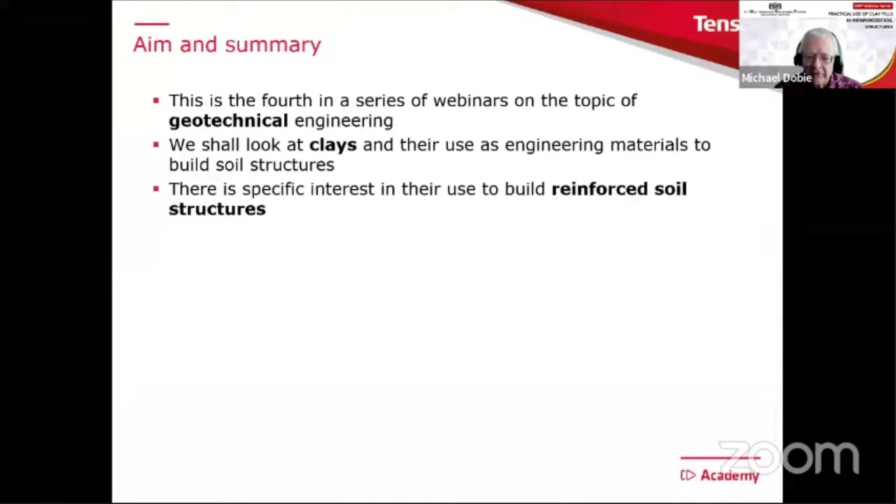So this is the interest today: looking at clays and their use as engineering materials, and in particular for reinforced soil structures. There will be another webinar in this series next month with a significant change of topic, where we'll look at the use of CPTs in soft clays. So quite a different topic, and that'll be next month.

So there is a list. In the first three of these webinars we've developed ideas about soil properties in general. We've looked at measuring soil shear strength, and we looked at the principle of effective stress. I think looking at clay fills is an obvious continuation of this theme, and that's the reason for this particular topic today.

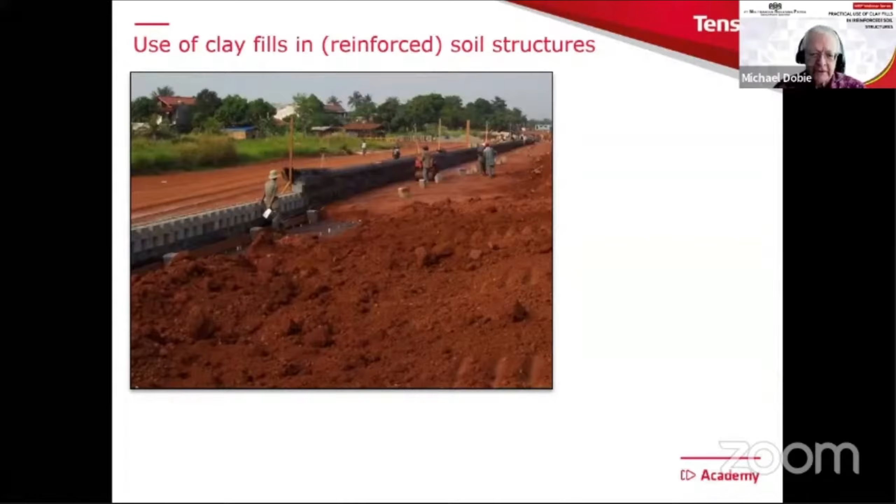So some pictures, some clay fills in action. This is actually construction of part of the Jakarta Outer Ring Road using our well-known Tanah Merah. This is a clay fill of volcanic origin material, and it forms a very good fill. One reason being that it has a predominance of a rather interesting clay mineral called halloysite, which at a microscopic level looks something like this.

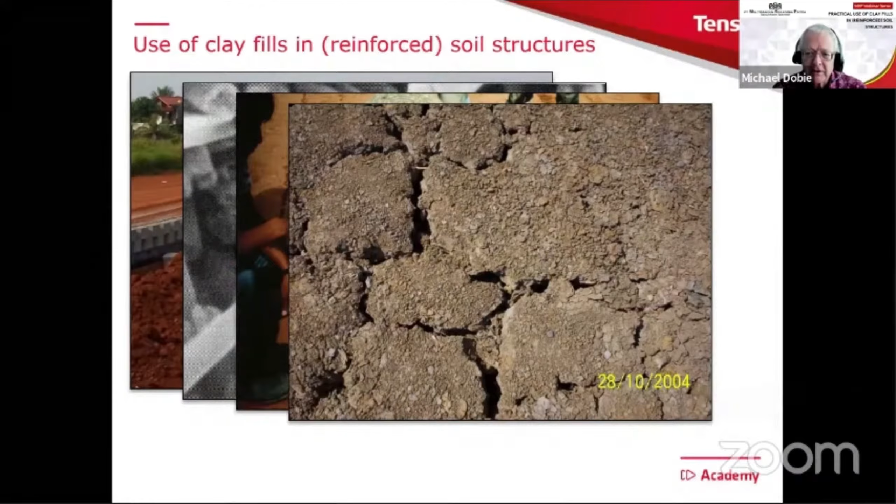Here's another nice microscopic picture, using an electron microscope, in this case of a marine clay. Again you can see that kind of structure. There's a scale bar at the bottom showing you what 2 microns looks like, so you can see that clay particles are clearly very small.

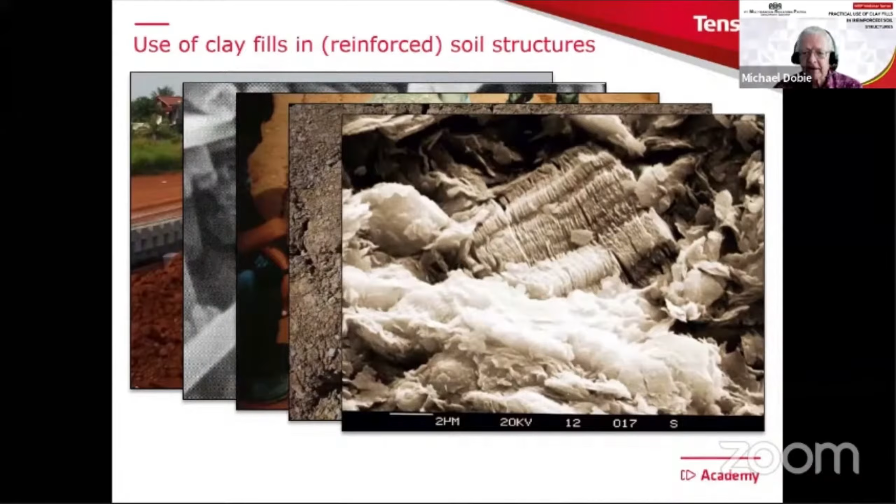What's this intended for, the webinar today? We're going to talk initially about clay, and we'll talk about some soil mechanics aspects of it. Then really the main aim is to look at one particular point: the likely pore water pressure that will be inside a mass of clay fill after you've built it. This is vital to understanding the next part, which is what are the appropriate drainage measures you should use when building a structure using a clay fill, whether it's reinforced or just a general embankment.

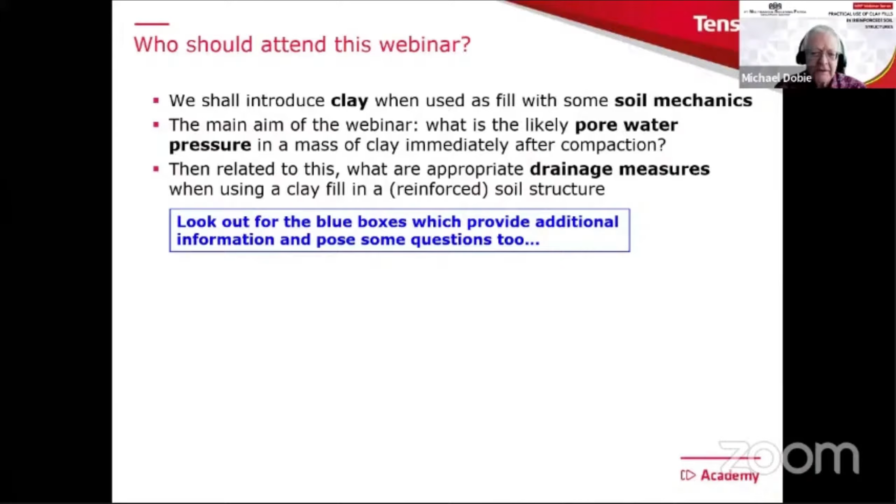As we go along through this webinar, as I usually do, there'll be blue boxes appearing with some additional information, and we may ask a few little questions as well. This is really intended for civil engineers who have some involvement in ground engineering - that's our main target - but hopefully also of interest to more experienced geotechnical engineers. The main target is, without a doubt, reinforced soil applications, but as mentioned, the ideas here could be useful for a wide range of design applications where we use a clay fill or other fine fills.

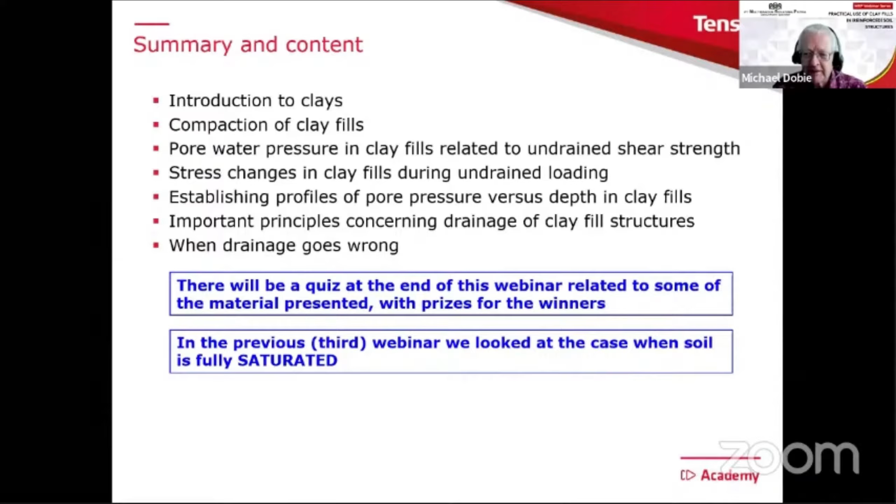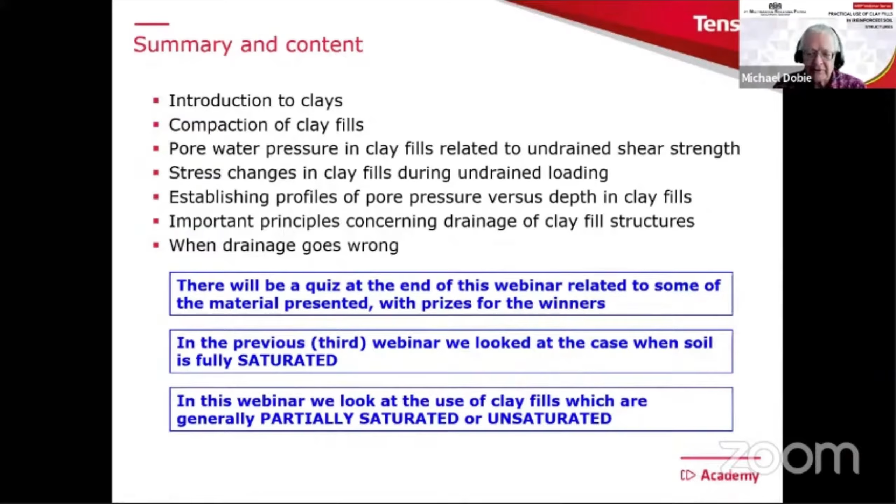Just to make a point that the third webinar, the one we did last month, that was looking principally at the case of soils which were fully saturated, softer soils maybe, but soils below the water table. The main difference today is that we're now looking at clay fills, in which case they're going to be either of two terms we commonly see: partially saturated or unsaturated. This does give some differences in behavior, and I will touch briefly on that a little bit later on.

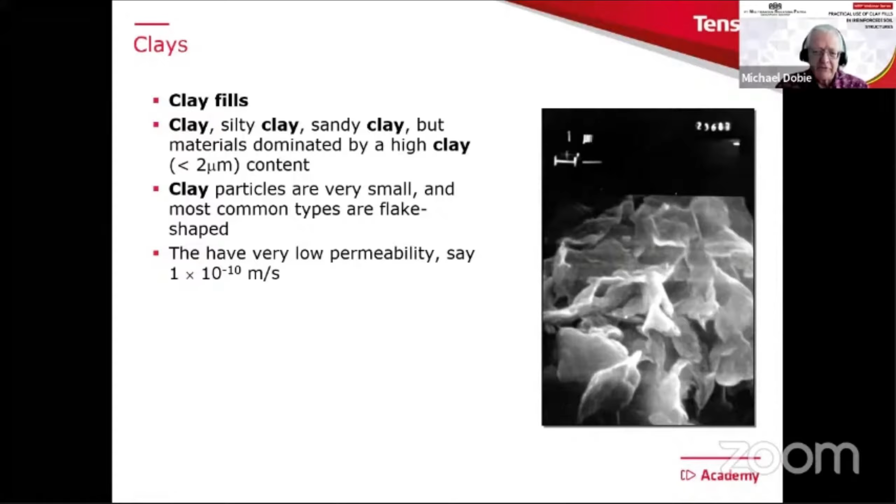Now this is a really small number, sometimes difficult to imagine what it really means. But in the first webinar, I came up with a different way of understanding what permeability means. So that particular permeability would be something like this: if you watched a particle of water traveling through 1 meter of clay under a gradient of 1, it would take 320 years. So you can see that water through a well-compacted clay travels extremely slowly.

Another good starting point when you're looking at clays and considering using them as fill would be to look at its Atterberg limits and plot them on the famous Casagrande or plasticity chart, where we plot plasticity index, the PI, against the liquid limit. This is a really useful diagram. I'm sure as you will know, we have a famous line called the A line, the thick inclined brown line going up there, which also matches very closely to the AASHTO designations of different soil types.

What would be the important targets for clay fills? You would want to have them certainly on or preferably below the A line. As you go higher above the A line, you tend to get into soils that are more susceptible to changes in moisture content. You'll get more swelling, more shrinkage, as we saw earlier in that picture of the cracked soil. So preferably below the A line.

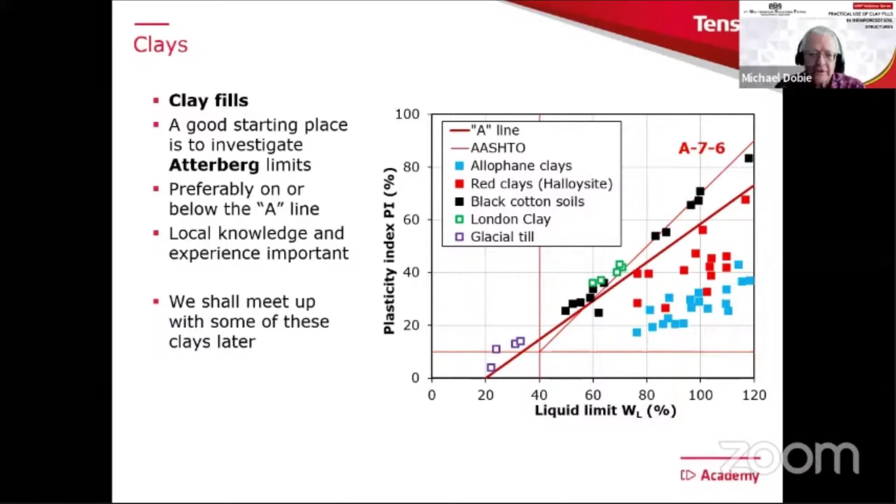So just a bit of a change of view for a minute, think about something different. I don't know if anyone listening today has ever had a chance to make a clay pot - maybe something you did at school, but it's fun. So what do you do to make a clay pot?

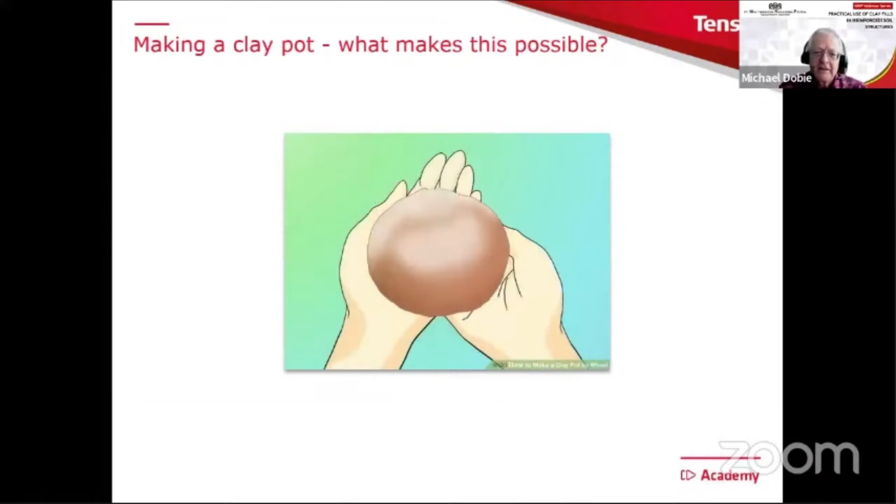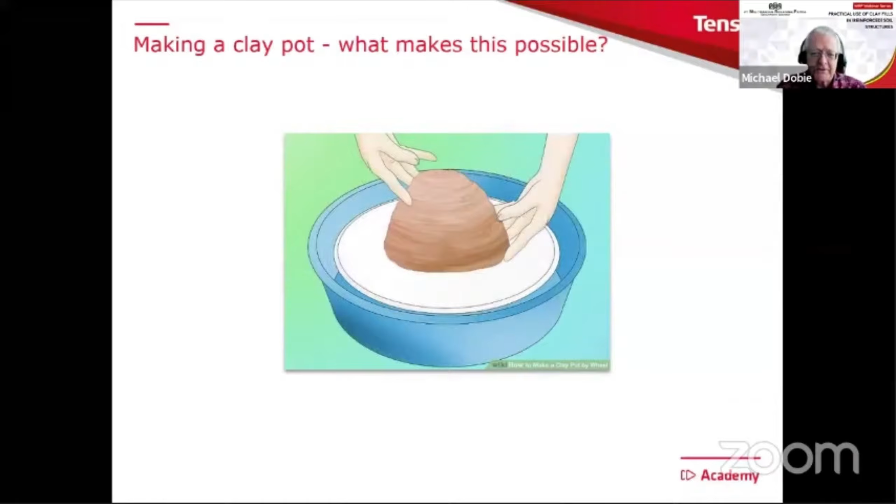You start off with a big lump of clay, which you knead into a ball, then place it on a wheel, which you can spin. In the good old days you'd do it with your feet, but probably now it's electric. Anyhow, this would spin, and then you could use your hands to create a shape as it spins round and round, maybe even creating a hollow in the middle to turn it into a pot, then perhaps make a nice shape at the top and end up with your pot, which you then remove.

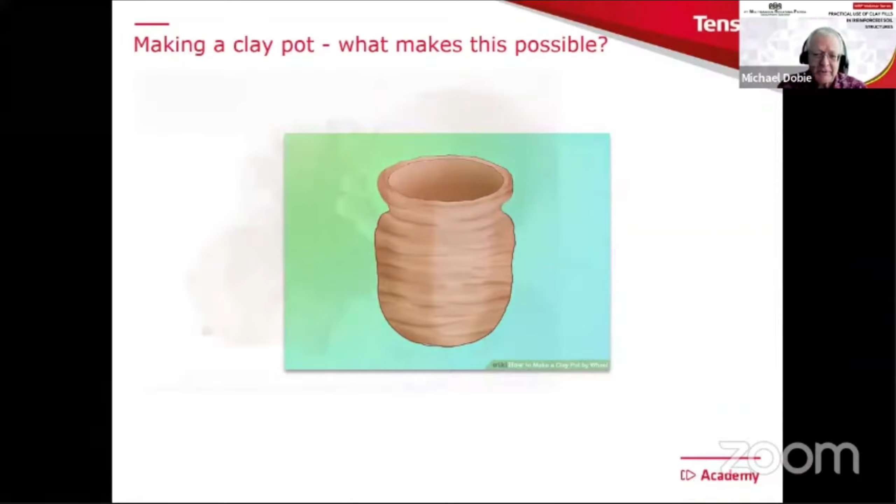And of course, you then put it into a kiln. The kiln will go up to a very high temperature and create significant chemical changes. But before that happens, it's a question - how on earth does that thing stay up? It's just clay after all. And how does it stay in that nice shape, especially when we look at the real case? There is the real situation - the ball of clay spinning on the wheel, and there is the pot before firing. How does it retain this shape so precisely?

I think the answer to this is much the same as the answer to the next question, because the next question will now move to civil engineering and look at a case like this, where we have a construction site - a clay fill, actually in the west of Java. You can see that this clay fill is supporting extremely heavy compaction plant. Well, how can it do that? There must be something going on that allows it to do that.

So I thought it would be useful to do a bit of soil mechanics at this stage. During the last webinar, I set a bit of a challenge to see if people could derive a particular relationship where we can predict the undrained shear strength based on the drained strength properties, or the effective stress properties C dash and phi dash, which we have to do by using the geometry of the Mohr diagram.

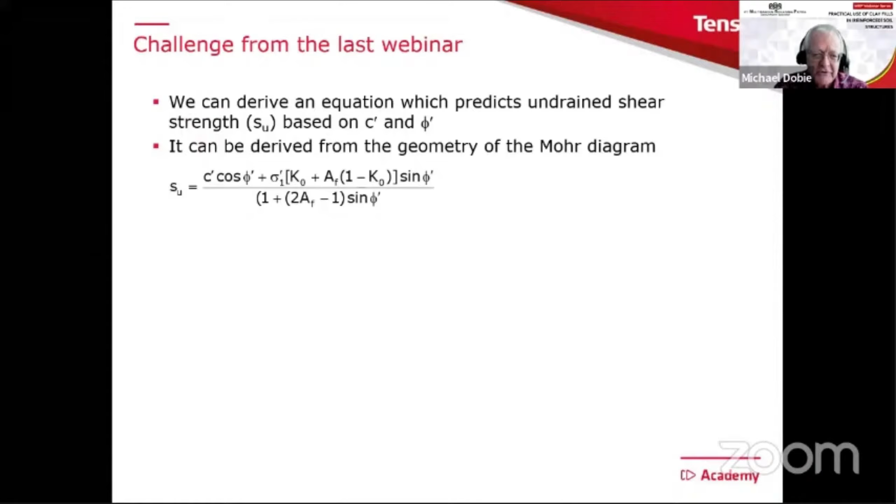If we do this, we end up with this expression where you can see we have undrained shear strength on the left, equal to quite a number of terms, but they're all very familiar. You need to know two things here to use it: K naught and AF. AF is the Skempton pore pressure parameter, relating change in water pressure to change in shear stress. And the challenge was, can you derive this from first principles?

I'm pleased to say, yes - James Utomo did this. He sent in his derivation, and it was perfectly correct. He received as a prize the book Mekanika Tanah by Laurie Wesley - that was the shorter book. Congratulations to James on doing that, he got it perfectly right. But I want to use that expression now.

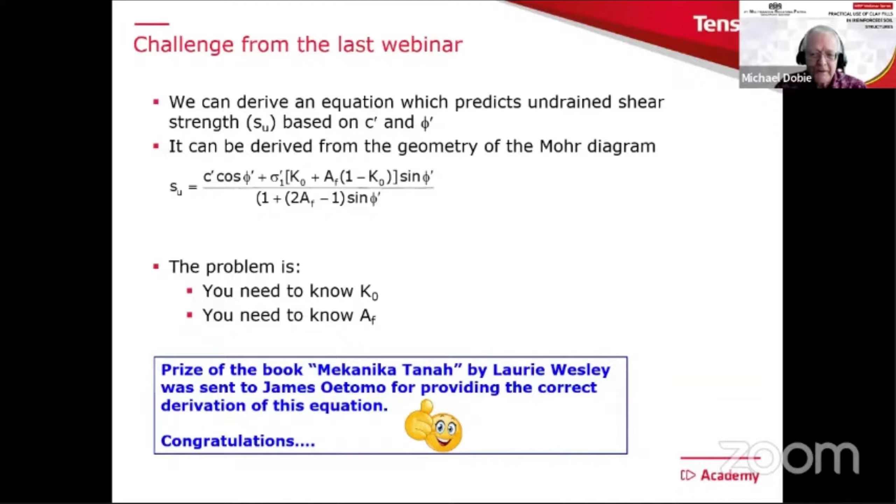Let's go back to our site and consider a depth of 0.2 meters below that very heavy vehicle or plant. Let's assume our water table or phreatic surface is at ground level, meaning the clay would be saturated. With that information and typical clay properties, assuming a K0 of 1 and an AF of 0, which seems reasonable for that material, if I put this into the expression, the undrained shear strength comes out at 5 kilopascals. If you know what that means, that's an extremely soft clay.

You almost certainly could not walk on it. And certainly if you tried to place and compact a clay with an undrained shear strength of 5 kilopascals, it would not be possible. So perhaps to understand this better, let's turn to typical compaction requirements we might use, especially for clay fills.

The normal starting point is a compaction curve, derived from the Proctor test. We develop a relationship between dry density of a soil and its water content for a particular compactive effort, and the red line shows the result as a series of plotted points. The solid black line represents the soil being fully saturated, meaning you cannot find points plotting on the right hand side or above that line.

The dotted line represents a 90% degree of saturation, or 10% air voids — meaning the pore spaces are mainly filled with water, but 10% of that volume is air. The traditional way of specifying compaction is based on achieving a certain percentage of maximum dry density over a certain range of water content.

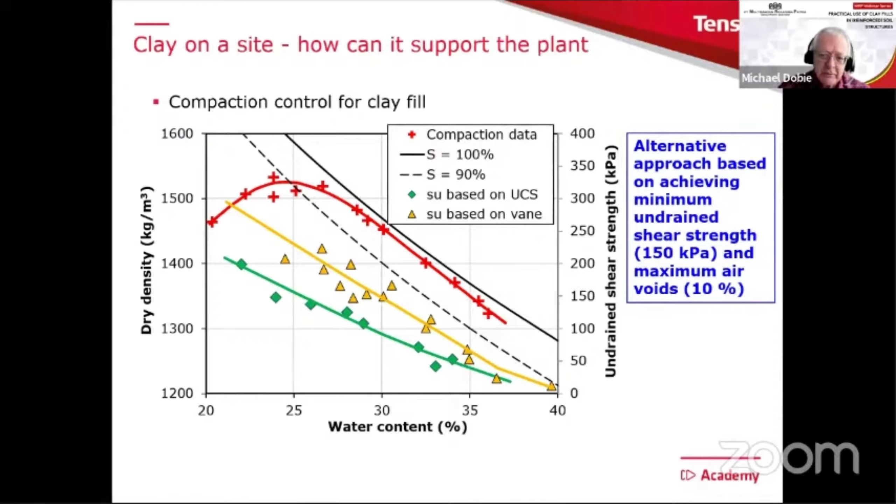Another way of doing this leans heavily on work from Laurie Wesley, coming from experience in New Zealand. This approach requires achieving a certain minimum undrained shear strength, which is easy to check with a hand vane or penetrometer, along with a maximum air voids content, typically about 10%. So our targets would be an undrained shear strength of 150 kilopascals and maximum air voids of 10%.

On this graph, I've plotted the undrained shear strength in yellow and green dots, taken from different compacted samples, with the scale on the right. If we restrict ourselves to at least 150 kilopascals of undrained shear strength, we need to stay inside this blue shape. It's a bit different now because we also want our maximum air void content to be only 10%, so it follows the S equals 90% line.

This is found to be a very good way to specify compaction requirements for clay fills. I'm not sure if anybody listening today has tried this rather than the traditional approach, but in many places, this is the preferred way of doing it.

What we can see from this, importantly, is that clay fills are going to be partially saturated — the pore spaces will contain water but also some air. The degree of saturation will be quite high, typically greater than 90%. If you had very low degrees of saturation, the clay lumps would become so hard you wouldn't be able to compact them. So you need a significant amount of water in the clay to allow you to remold and compact the material.

If you attended that webinar, we looked at a case where we have a soil element below a water table underneath an embankment, and we wanted to understand what happens when we apply a total stress to that soil element without drainage taking place. The way I did this was to isolate the little element and have a close look at it like this, and to make it easier we enlarged it, then looked inside to understand what would go on.

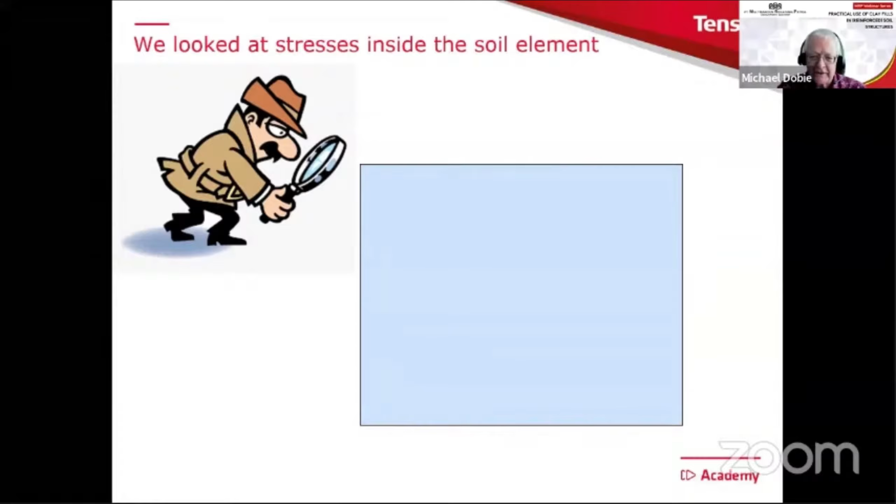It was quite a long description, so I've just taken part of it. What we're looking at here is a box, and in this box the top can move up and down. The brown lumps are the soil particles, and the blue is the pore water. If it's fully saturated, then it's all blue. We then looked at the case of applying a load to it.

Before I get there, just to mention, on the right-hand side we have a gauge to measure pore pressure, U, and we also have a tap. Today we're going to keep the tap closed because we only want to look at undrained behavior. So if the tap is closed and nothing can leave the system, this is the undrained condition. Above the box I've written the principle of effective stress, saying total stress equals the effective stress, the intergranular stress, plus the pore pressure, the pressure within the pore spaces, in this case in the water.

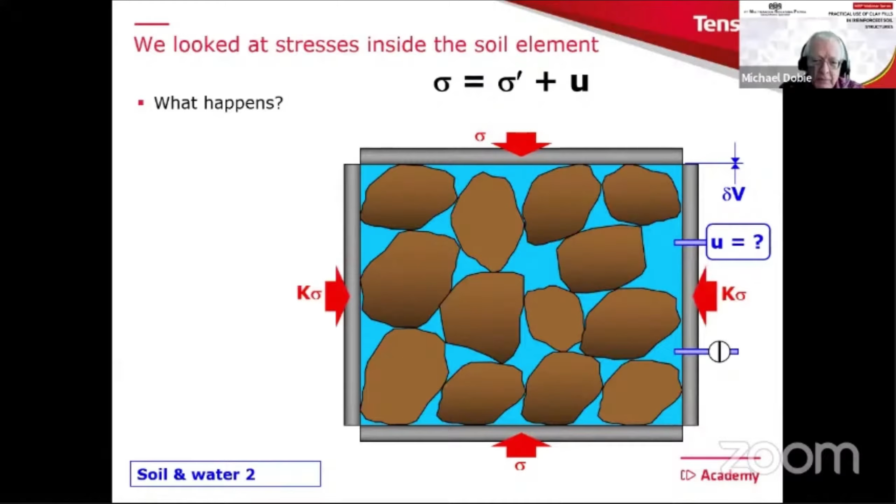So we're going to apply a load, sigma, on the top, or a stress. Then the question is, what happens when we do that? We need to restrain the sides to prevent the box from breaking open, so we apply K times sigma there. The question we asked, same as last month, is: if we do this, then what's U? What is delta V, the change in volume? And what is K, the proportion of sigma required to prevent the box from splitting open?

In this particular case, we also want to know something else: what is the stress that's transferred through the soil grains, which would be the effective stress? In this situation, it'll be like this: the U value will be the same as the applied sigma, the change in volume will be 0, the value of K will be equal to 1, and the effective stress will be 0.

The important point is to understand why this is the case. It's because in this system the assumption is, certainly at the level of soil mechanics, that the soil particles and the water are both incompressible, but the soil skeleton itself, the assembly of soil particles, is compressible. So when it comes to sharing that stress, because the water and soil particles are incompressible, that stress all goes through the water. Because we have no space to compress the soil skeleton, it's unable to carry any of that load.

So again, we'll isolate it, we'll have a close look at it, and before we add the soil, let's think about what happens to the pore fluid itself. I'm going to take my test box and fill it up with water, but this water has air bubbles in it - that's the little white things. Because of the presence of the air, it makes this fluid a combination of a liquid and air bubbles, which makes the fluid compressible, meaning delta V over sigma is going to be something greater than 0, whereas in the saturated case it would have been incompressible.

So I'm going to apply a stress. I'm going to have to hold the box at the sides to prevent it from splitting open again. The question again is, when I do this, what is U, what's delta V, and what is K in this particular case? The answers are: U will again be equal to sigma, but delta V, if I do it again, you see delta V is something greater than 0 now because the system is compressible. And K will again be equal to 1.

Just to remind you, in this case we're still looking at the situation of no drainage. So what this means is that we now have a pore fluid which is compressible.

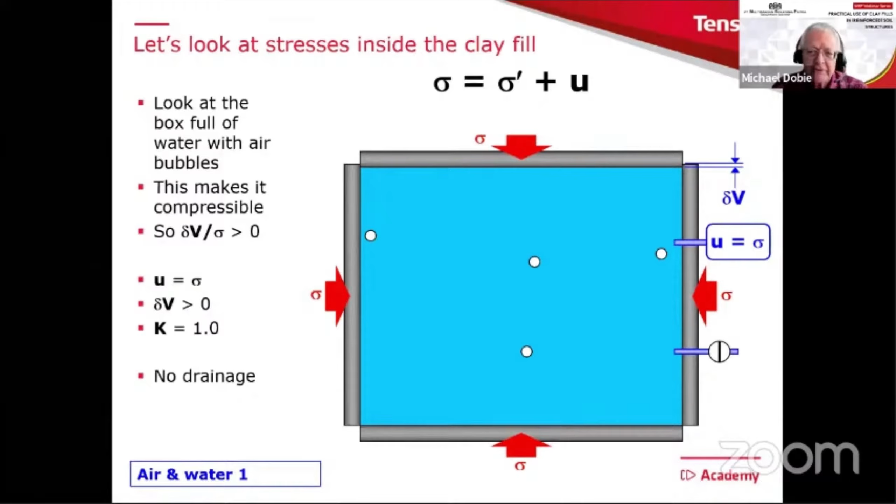One thing to note about this system is that when we get that reduction in the volume of the air bubbles, it's partly caused by air going into solution. If we increase the pressure more and more, then more and more of the air dissolves. And eventually, if we go to a very high pressure, the air dissolves completely - in other words, it's no longer present as free air. We then return to the fully saturated condition. That would be at high pressures.

So I'm now going to put the whole system together. We now have the 3 elements of the soil: we have the solid particles, which are incompressible, but the soil skeleton itself - that's the assembly of soil particles - is compressible. And now so is the pore fluid, because it's a combination of water and air bubbles.

Now, at the moment, with no shear, with no normal stress applied, no external stress, what's the shear resistance here? Well, of course it's currently 0 because there is no stress being applied.

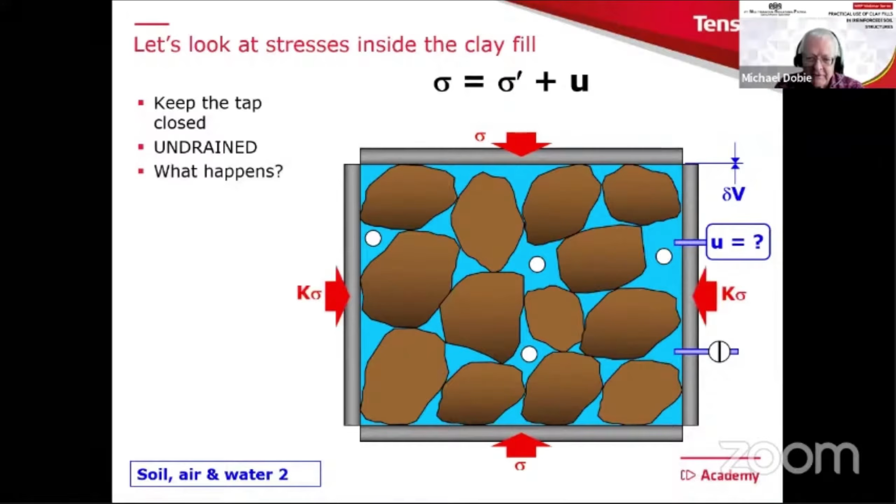So we're now going to repeat what we did for the saturated case. We're going to apply sigma, remembering all the time that this is undrained - I'm never going to open the tap in this little discussion today. So it's undrained and we apply sigma. Question is, what happens? We have to hold in the sides of the boxes. What is U, what's delta V, and what is K? And the answers are going to be like this. Oh, and also, of course, what is the effective stress?

And it's going to be like this. Now, you see, as I allow that sigma to be applied - I'll do it one more time - you will see that there is a small reduction in volume. That's happened because we have a compressible soil skeleton and a compressible pore fluid. Because they're both compressible, the whole thing can compress, even though it's undrained. You'll also notice I made the little air bubbles become smaller.

So this means that U is now going to be something greater than 0, but less than sigma. Delta V will be something greater than 0. K is going to be K, it'll depend on the soil properties. And also we see that there is a small increase, a small effective stress generated because there is a compression of the soil skeleton, then sigma dashed is something greater than 0.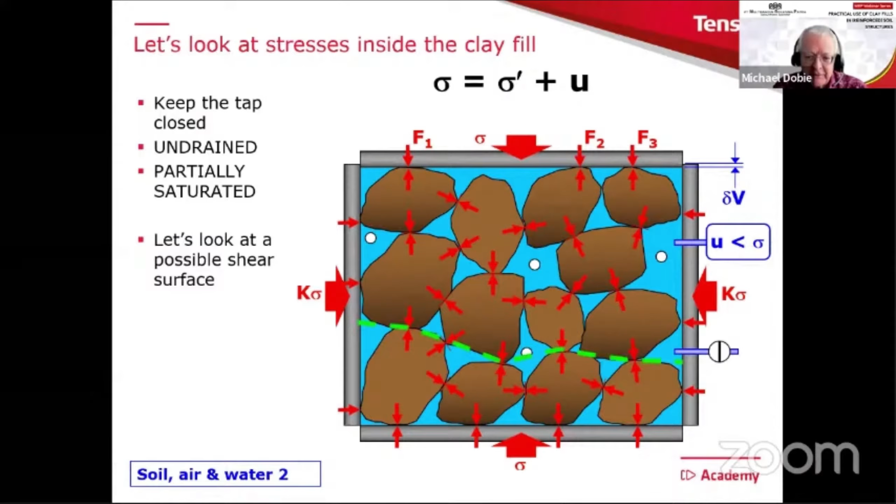And of course, the important principle of effective stress would say that the effective stress is going to be the total stress minus U. This means that now, if we look at that possible shear surface, we find that there is a resistance developed there. So the shear resistance created by the undrained increase in external total stress is something, and that's happened because the effective stress is greater than 0.

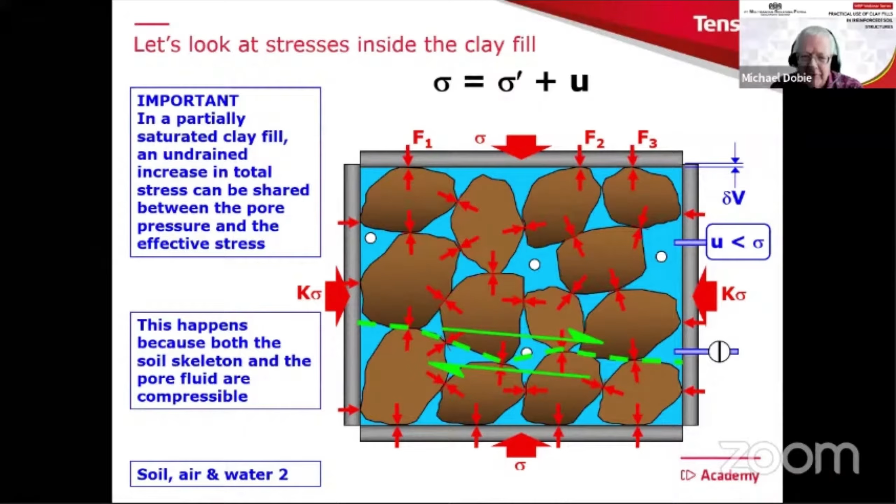An important conclusion from this is that in partially saturated clay fill, an undrained increase in total stress can be shared between the pore pressure and the effective stress. This happens because both the soil skeleton and the pore fluid are compressible, and this is an important difference compared to saturated soils.

Now I want to get another clue towards looking at the relationship between undrained shear strength and the pore pressure in the soil sample. To do this, I'm going to look at an unconfined compression test. This is a very simple test, I'm sure you're all familiar with it. You simply put your sample of clay into a machine and load it until it fails.

What's nice about this test is that the piece of soil you see in the machine could just be a lump of soil ready to be compacted into your project, into your clay fill. I'm going to look at some results published in a very famous paper by Bishop and Bjerrum in 1960, where they present the results from an unconfined test on remolded London clay with the properties you can see there. Here's the result.

So we have strain in the horizontal direction, and the green dots show the increase in deviator stress until the sample fails. It fails at about 68 kilopascals, so that means the undrained shear strength is half of that, about 34.

But what's also rather nice in this test is that they arranged it, almost certainly inside a full triaxial apparatus, so they could also measure the pore pressure. When we look at the pore pressure response, we see it starts off at almost minus 40 kilopascals, then becomes a bit higher, and then drops off again.

So we can see that the pore pressure inside that sample is negative. Although the clay is soft, with undrained shear strength only 34 kilopascals, it was necessary for there to be an initial pore pressure of minus 38.2 kilopascals, a suction, to create that particular undrained shear strength. So even though the clay is soft, it's in a state of suction.

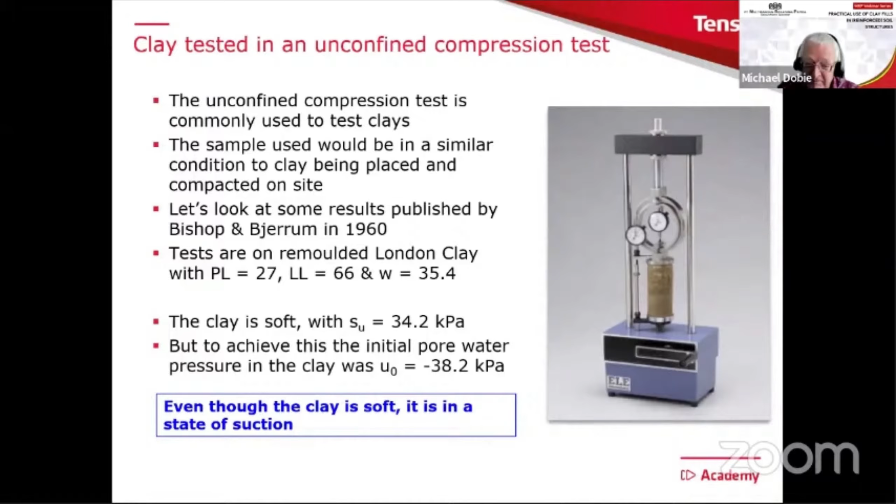So let's go back now to that particular situation on the site in West Java and see how it's going to work. This is what we calculated earlier when we assumed that the water level was at ground level and the clay was saturated, which clearly is not the case.

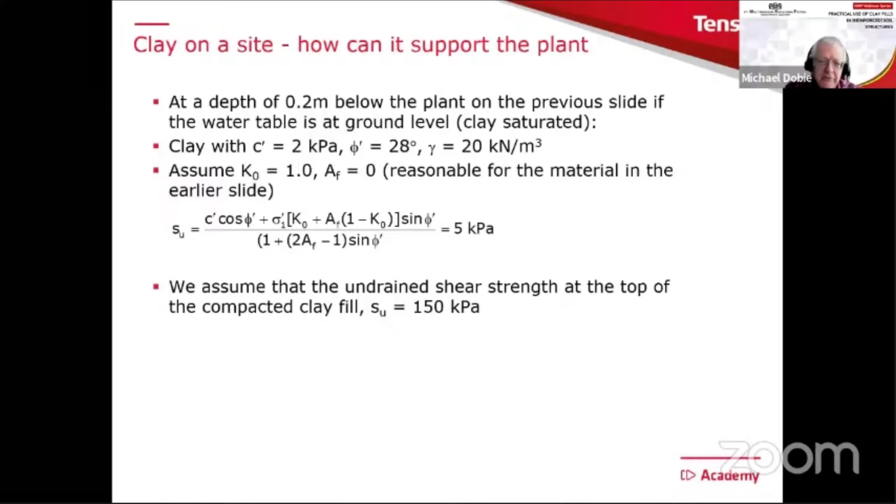So what I'm going to do now is use my formula, and I want to get SU, undrained shear strength, to become 150 kilopascals. If you look at that formula, everything is fixed except the one thing we can change, the effective stress, sigma 1 dash, that's the vertical effective stress at that point in the clay.

The total stress is also fixed. At that depth, the total stress is 4 kilopascals. Therefore, the only thing that can be changed to reach that undrained shear strength is the pore pressure. In fact, we need to make the pore pressure minus 162 kilopascals to achieve that undrained shear strength.

In other words, it's a very high suction, and that's what's going to be present in that clay. That's the reason why that clay can hold up that very heavy machine, because of this high suction. It's also the reason why the potter can make his pots.

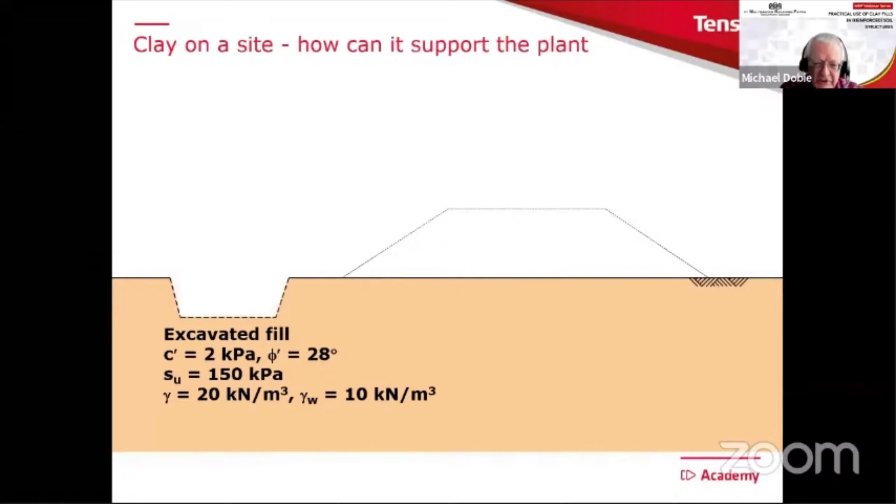So if we try and imagine what's going on at that site, there is our initial situation, and we're going to excavate the fill from a borrow pit. We have those properties we mentioned earlier. So we dig it out and start to place it, and we run a compactor up and down there, and look at that particular element just now.

What we found was that it had a total vertical overburden stress of 4 kilopascals at 0.2 of a meter, and the pore pressure was minus 162, which is a suction, of course. So that was when we first placed that layer.

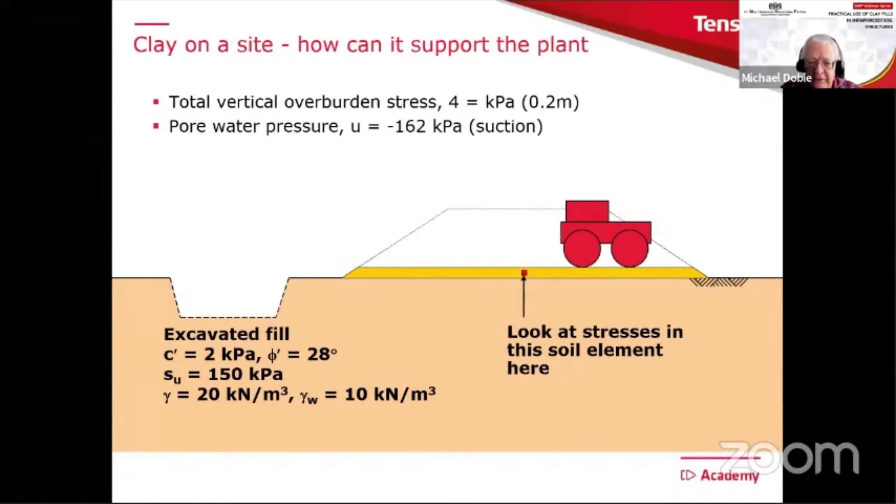What happens as we build up the fill higher and higher? We're going to build this fill to something over 10 meters. As we build it up, there will probably be a bit of an increase in the undrained shear strength because of the reasons I mentioned just now, so maybe that's a little bit higher now, a bit higher than 150.

But in this situation, I can use our formula again to look at the stresses and the pore pressure in that element. The total overburden stress is now 204 kilopascals because it's 10.2 meters high.

We find that the pore pressure has just become positive. In that situation, it's just 21 kilopascals. So you can see how the pore pressure has changed due to the undrained application of the load above the soil element.

A very nice way to summarize this kind of data is on a diagram like this, where we plot the pore water pressure along the horizontal axis. There's zero in the middle, going negative to the left and positive to the right. The vertical axis is the total vertical stress, which we can simply calculate as the height times the unit weight. If we assume a unit weight of around 20 kilonewtons per cubic meter for well-compacted clay, we can add an axis.

We can also calculate what's called a pore pressure ratio, simply the ratio of the pore pressure to the total vertical stress. I can then plot lines of RU value like this. You can see that we have RU positive on the right-hand side, and because pore pressure is negative over on the left, the RU values go negative. The thick blue dotted line would be a typical value of RU when we have a hydrostatic water table condition—in other words, the water table at ground level, which we assumed at the beginning of our exercise.

So what I'm going to do now is add the two dots we just calculated. The brown one was when we first compacted the clay fill, and the blue dot is when the fill reaches a height of 10.5 meters. You can see how we have just gone into positive pore pressure at the blue dot, as we calculated. I can also add my original calculation where I found that very low undrained shear strength—that's the purple dot up there near zero.

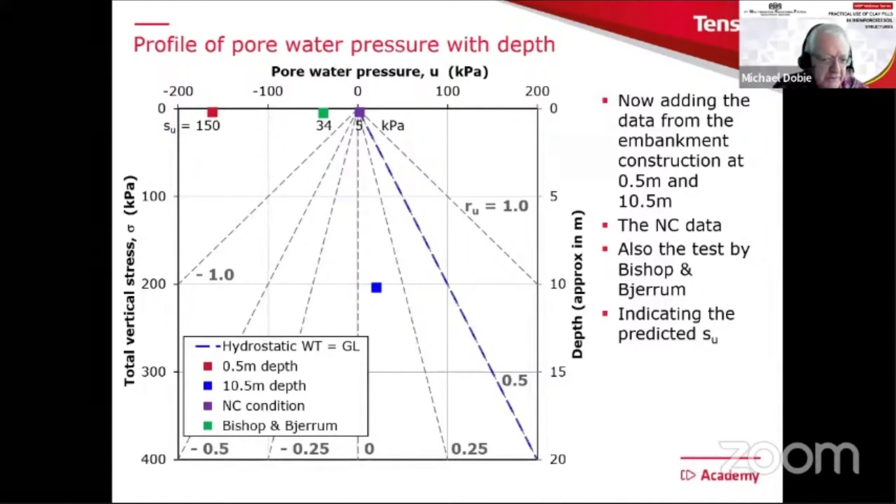I can also add the data from the Bishop and Bjerrum test, which is the green dot, and add to this diagram the undrained shear strength applying in each of those cases. What you can see is that at very shallow depth, as you move to the left on this diagram—in other words, as your suction becomes higher and higher—your undrained shear strength is also becoming higher and higher. That's what we'd expect to see when compacting a clay fill.

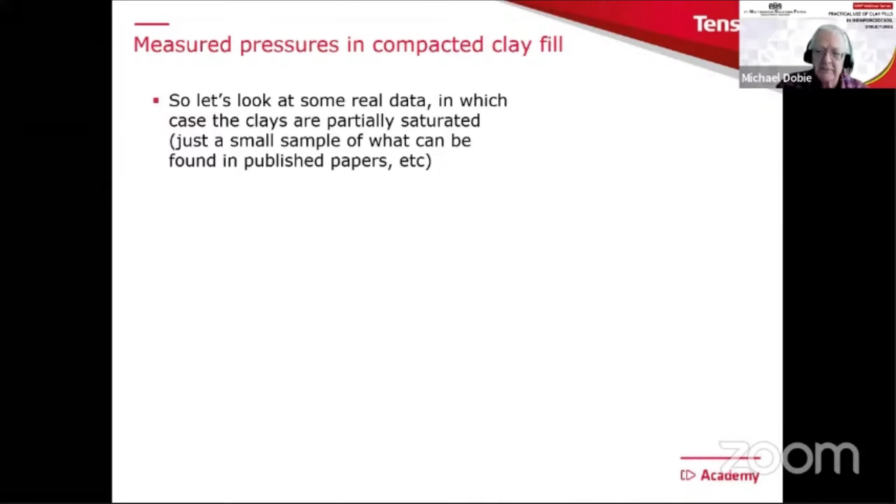Now that was a bit theoretical. So what I want to do now is look at some real data using that same diagram, reminding ourselves that clays are partially saturated. I'm going to show you just a small sample, mainly from that clay fills conference I published in 1978, but you can find lots more data of this type. We'll look at some laboratory testing and some measurements from site.

Same diagram, I don't need to explain that again, but in this case those four lines are all derived from laboratory testing on a UK clay called Lias clay, which is a reasonably plastic clay. A number of samples have been recompacted to achieve a certain undrained shear strength in the laboratory, and then a test is done to look at the relationship between the vertical stress and the pore pressure. You see the nature of that curve—it's heading up. So if you can imagine going down to very, very small total vertical stresses, you would get very high suctions in those samples.

We also see that generally, as the undrained shear strength increases at any particular total vertical stress, the pore pressure reduces.

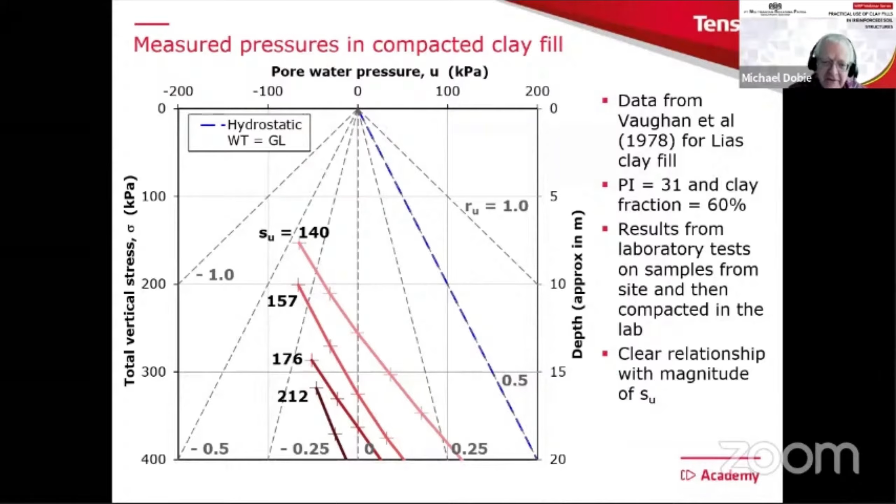The last of these examples is a highway embankment, very typical one, 12 meters high, again in the UK, built from London clay, quite plastic. Unfortunately, in this case, the undrained shear strength was not reported, but the clay was generally placed on the wet side, so perhaps the undrained shear strength is going to be lower than 150 kilopascals that we identified earlier on.

Here is the profile through the 12 meters of the fill of the pore water pressure against depth. The fill is 12 meters high, as you can see on the vertical axis. This is the measured pore pressure, both in the center line and towards the edge of the embankment, at the end of construction, EOC. You'll see that in the top part we have negative pore pressure, and then as we get down towards the bottom of the clay, the pore pressure does become positive, very much following the trend we were looking at earlier on in the more theoretical way.

So just to summarize in this picture, there is our 12-meter high clay fill. The upper two-thirds is in a state of suction, and the lower one-third has a positive pore pressure because of the effect of the undrained loading of that clay. And of course, that is dissipating towards the basal drain. So later on, when we talk a little bit about the importance of drainage when we use clay fills, this is a very useful little diagram to remember, because you need to take that into account when you think about the planning and design of drainage systems for clay fills.

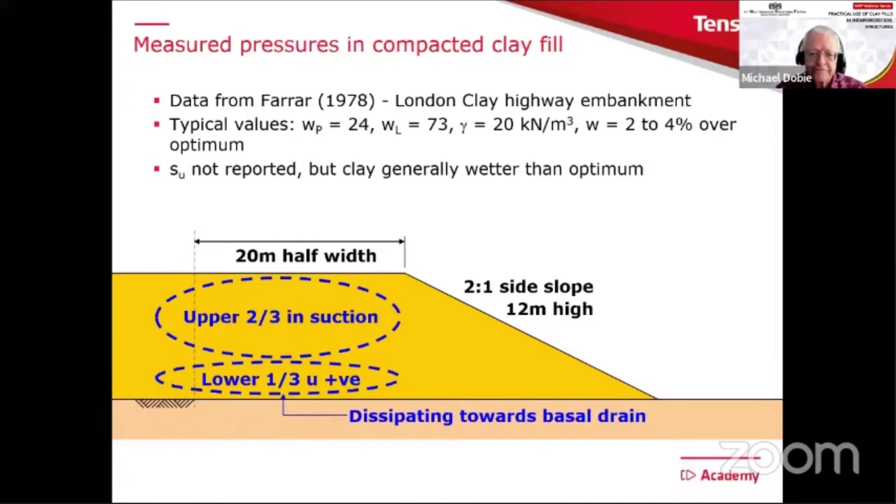So what are the conclusions so far? We have seen that a well-compacted clay fill, certainly to typical highway specifications, is likely to be in a state of suction to a considerable height, say at least 10, maybe 12 meters. That last case, the clay was rather on the wet side, according to the paper. And it's only going to be at the base of high fills in excess of those values that you're likely to get generation of positive pore pressures.

So what's the implication of this when it comes to drainage measures? This is really perhaps the main target of this talk today: how you would go about designing or laying out drainage when you're using a clay fill.

So to do this, I'm going to introduce you to a gentleman here whose name is Clay. In fact, I guess here in Indonesia, we're going to call him Pak Clay, all right? This guy, Pak Clay, he's in a permanent state of suction. You can see him there, he's got this drinking straw, and whenever you put Clay's straw into free water, then the water will travel from where it is into Clay in any direction - it can go uphill, downhill, in any direction, because clay is always in a state of suction. And he prefers to be that way, because once the water goes into clay, he will swell and soften. He doesn't want to do that. He doesn't like swelling and softening. He wants to remain in his state of high suction.

And the diameter of the straw is of importance, because it's like permeability. So if the straw is very, very thin, then in the short term, clay will not receive much water, but he will still receive some.

If we leave it there for long enough, he would eventually empty the glass. That's a little bit like the situation when we're trying to plan drainage in contact with clay fills. So we have a little message coming from Clay here: look, based on this, please could you minimize my exposure to free water, because I don't like it. That's what is worth thinking about when we talk about drainage.

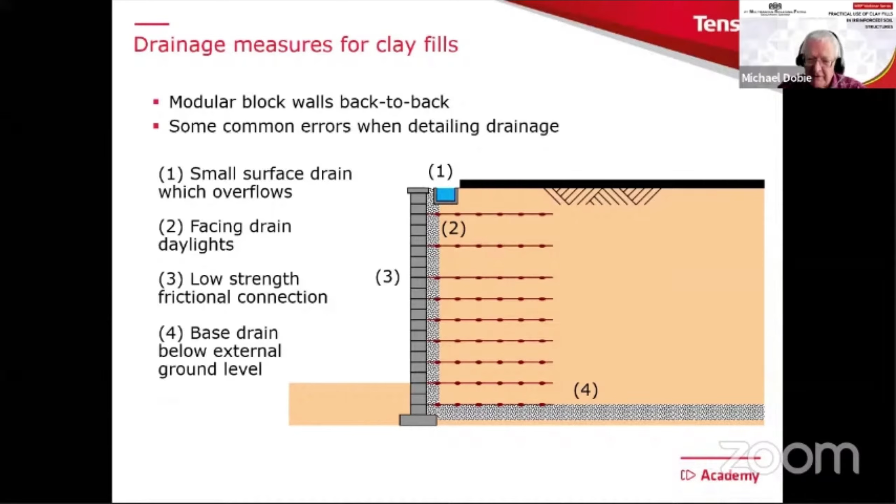Also we see a mistake here is that a basal drain is being used, which is often a good idea - it acts as a capillary break between deeper soils and the fill - but it's been placed below the external ground level, just at the bottom of the fill, which is often done. But the question is, how does the water get out of it? We don't want to leave that drain full of water. Remember what Clay says: don't put me in contact continually with free water. So unless you have some system of pumping or a very deep drain on the outside, how do you keep that drain empty? So these are all, if you like, errors.

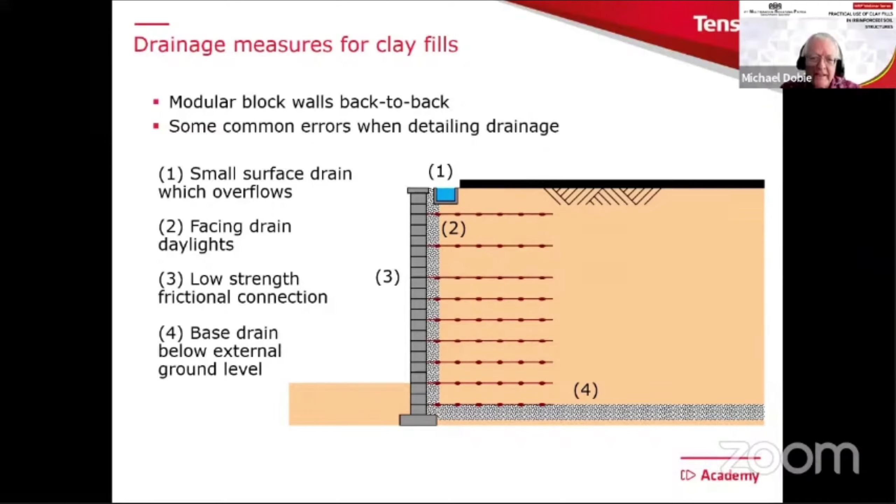Now let's look at the same cross section and correct the errors. First, we'd like to have a nice big drain adequate to carry any likely surface water flows. We seal the facing drain - that's to say the granular layer behind the modular blocks - we seal that from the surface. We don't want surface water running into that drain. We want to have high strength mechanical connections just in case there is some swelling, so it can be resisted by the connection.

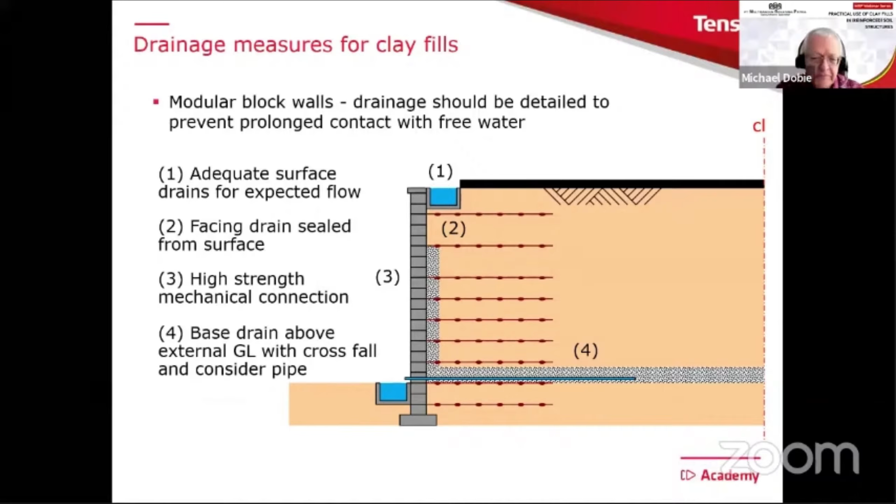And then the basal drain is far more effective placed at a level whereby it can easily drain to the outside into, say, a drain at the toe. You can even consider putting in some slotted pipes, maybe wrapped in a geotextile, to help encourage that drain essentially to remain empty. So these details are really quite important when it comes to drainage for clay fills.

If we look at a more general case of perhaps a higher fill built up against a hillside where there might be some internal water flows, the principles are much the same, but perhaps a few other things to think about. We are expecting the upper part of that fill to be in a state of suction, and the lower part could become positive if the fill is very high. And also we might have some internal flows.

But the first thing is we want to design surface water drainage adequate to intercept any surface water flows, and have crossfalls and so forth to make sure that water is taken away and doesn't stand there for long periods of time, which would then be able to infiltrate the clay fill.

If you have internal water flows, it's best to intercept them with a gravel drain at the back and base of the reinforced soil structure, or the soil structure in general. That would be a very important detail, possibly with an exit pipe to make sure that drainage layer remains empty.

Also, when you have a gravel drain at the back of the reinforced soil block or compacted fill, it should not daylight. It's a common mistake you'll see - people often put these drains coming out at the top. If you do that, surface water can run down that drain and come out at the bottom, giving another big potential for the clay fill to absorb water and soften, which you don't want to happen.

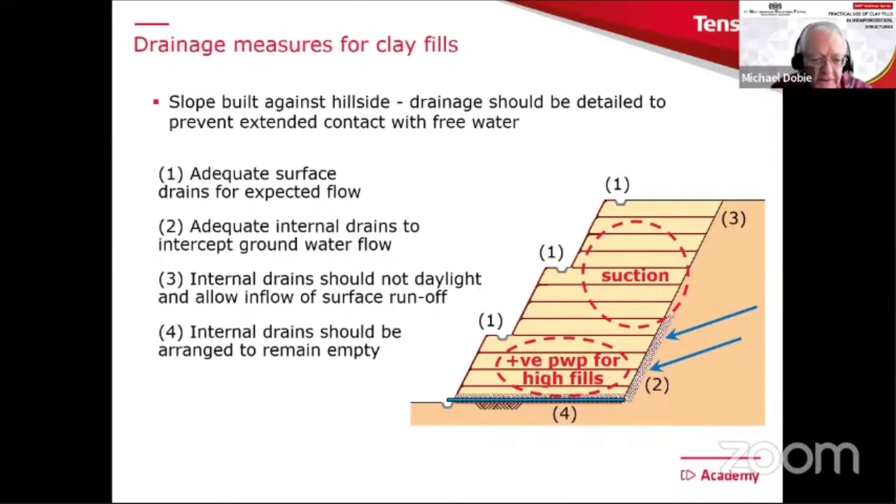Also important, the internal drains should be arranged to remain empty. You don't want them sitting there full of water. Just remember our friend Clay and what he asked - he said please don't put me in contact in the long term with free water. So these are some of the principles which I feel are very important when designing drainage in conjunction with clay fills.

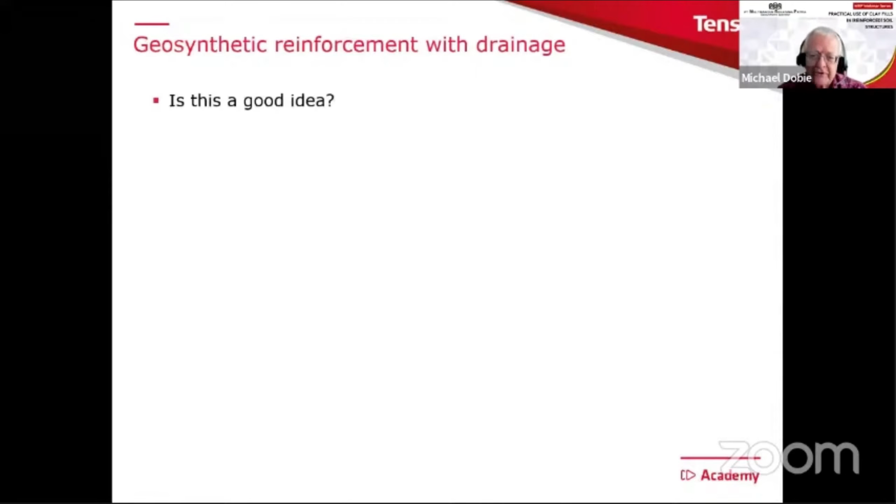Now, there are forms of geosynthetic which combine reinforcement and drainage. Is this a good idea? I'd have to say, as with any engineering material and decision, it depends on the design situation. But simply put, if a mass of clay is in a state of suction, the only possible result of including thin drainage layers throughout that clay would be to provide a path for water to enter the fill. And if it did that, this could cause swelling and softening. It's something I often like people to think about - when you create a drainage detail designed to let water out of a system, if things go wrong, it could let water go into the system, which you don't want. So just think carefully about that.

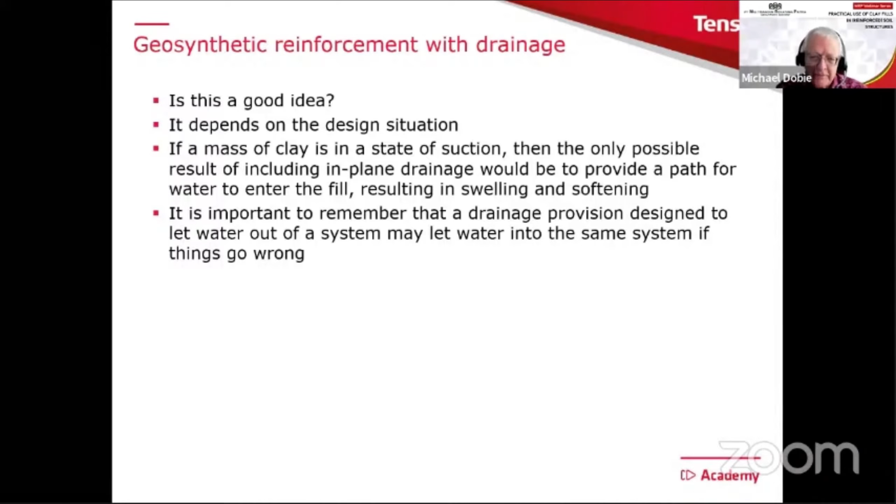The last thing I'm going to cover today is an example from a project in the UK on the London orbital motorway, the M25, where an interesting failure took place. Let's try to understand what happened. I was actually involved in investigating this failure, so I had first-hand experience, and the photographs we're going to see were taken by me at the time. There's a very detailed report about this published long ago in the proceedings of the ICE, and there was an extensive discussion - if you really want to learn a lot about this, the discussion is probably almost more important than the original paper. You can see the discussion was 24 pages of it.

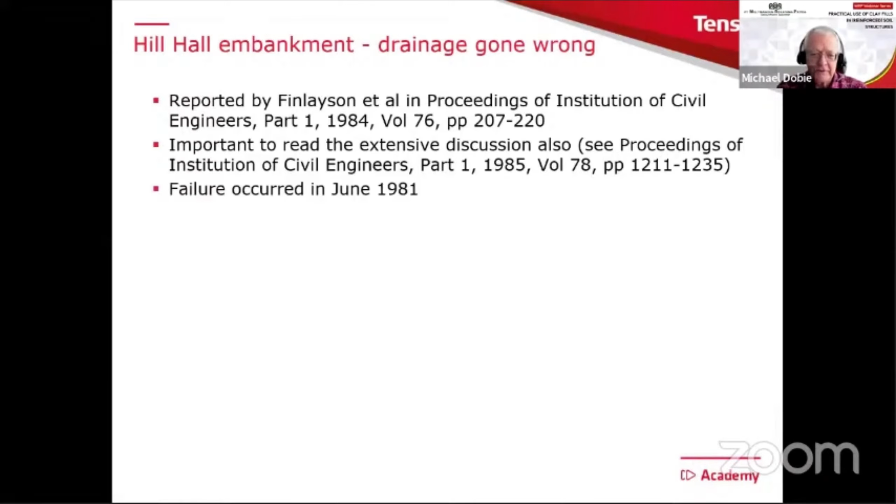Very important document - the failure occurred in June 1981, on the M25 as I mentioned. Without a doubt there were some very important lessons learned, especially concerning drainage blankets and the importance of avoiding creating a water source in contact with a compacted clay fill. Just think about our friend Clay again, our compacted clay. So let's have a look and see what happened.

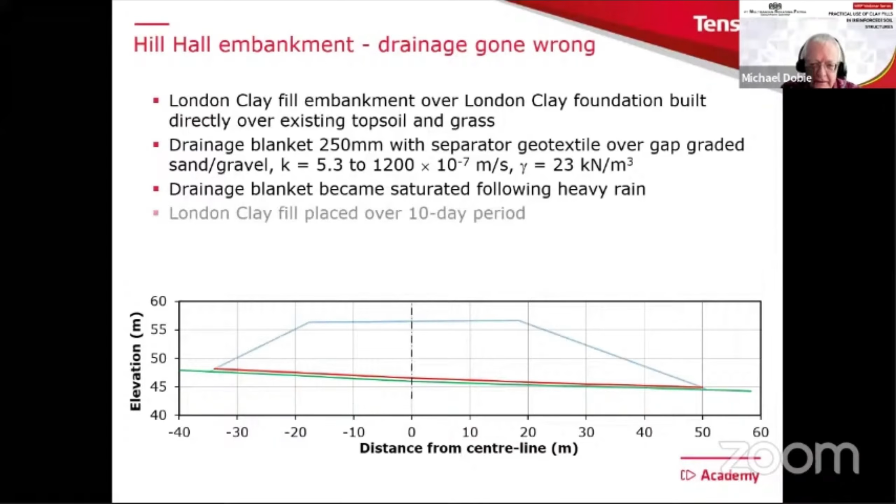The site was like this - we're looking along the center line of the highway. In this part of the site there was a slight crossfall from left to right. So what they did, they placed the drainage blanket directly on top of the topsoil and the grass. In this case, the drainage blanket was not actually that high a permeability, if you look at the numbers there. Almost certainly as it sat there it became saturated with rain. Then, as is often the case with earthworks, the contractor suddenly got very busy and managed to place all of that London clay fill in a 10-day period, reaching about 12 meters high at the highest point - a huge amount of clay placed extremely quickly.

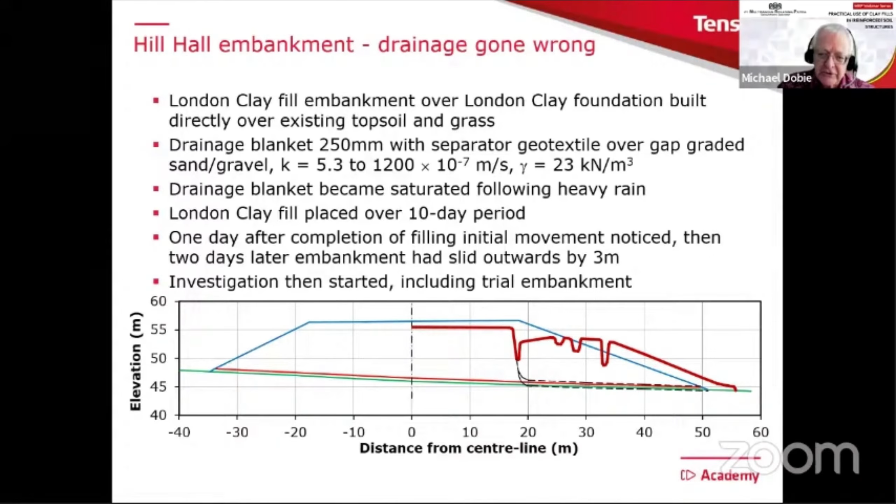Unfortunately, within a short time after completion, it starts to fail. First the cracks appeared, and just two or so days later, the toe had moved out by about 3 meters. Because this was a rather serious situation which no one really expected, a significant investigation was carried out, including building a small trial embankment, which we'll look at in a minute.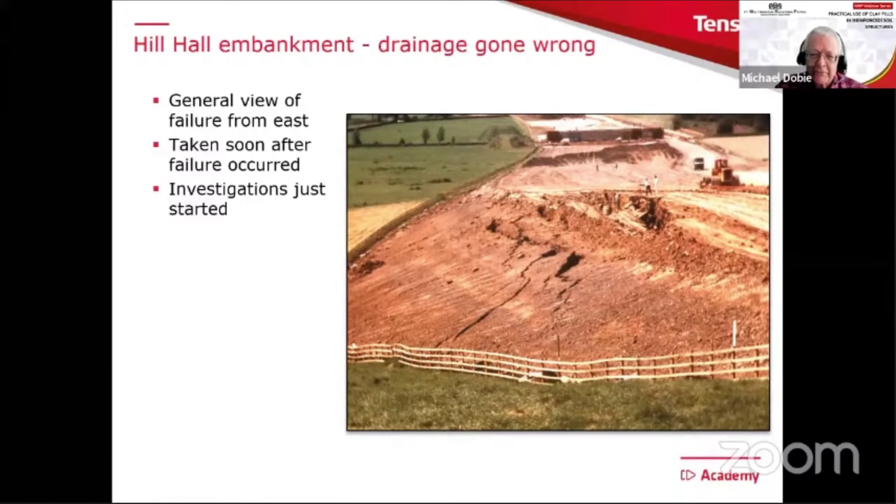So here's one of my photographs. When I first arrived at the site, you can see very clearly there the failure. Investigations had just started. There's already someone, I think, doing a borehole up there somewhere. The usual kind of thing that goes on in these cases.

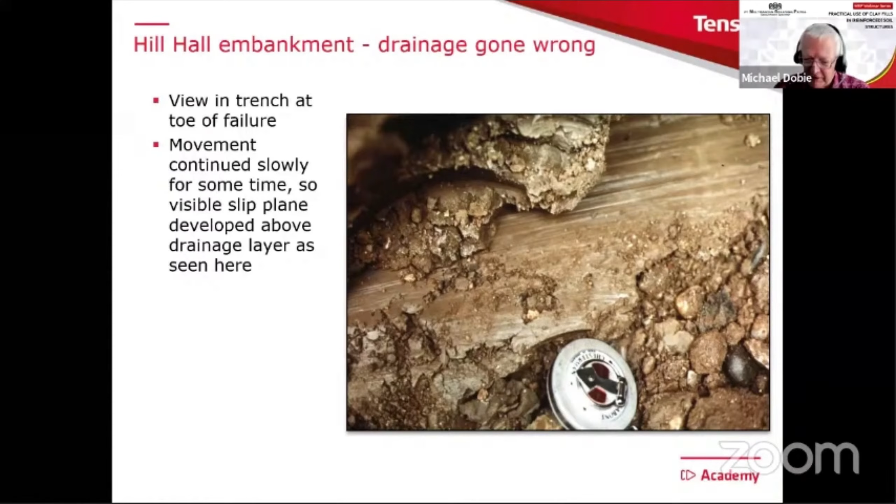You can see how the toe of the embankment has broken down the fence at the edge, which means the embankment is now moving into the property of the farmer on the left-hand side, so he'd be very happy that that's happening. What was rather nice here, and I've shown this picture many times because it's so interesting, is that a little trench was dug into the toe of the embankment, but possibly by mistake, it was dug at a slight angle, which meant you could start to see the appearance of the sliding surface between the clay above and, in this case, the drainage blanket material at the bottom.

And clearly this required some thinking about what should happen. So it was important to understand the pore pressures and what happened with the drainage blanket.

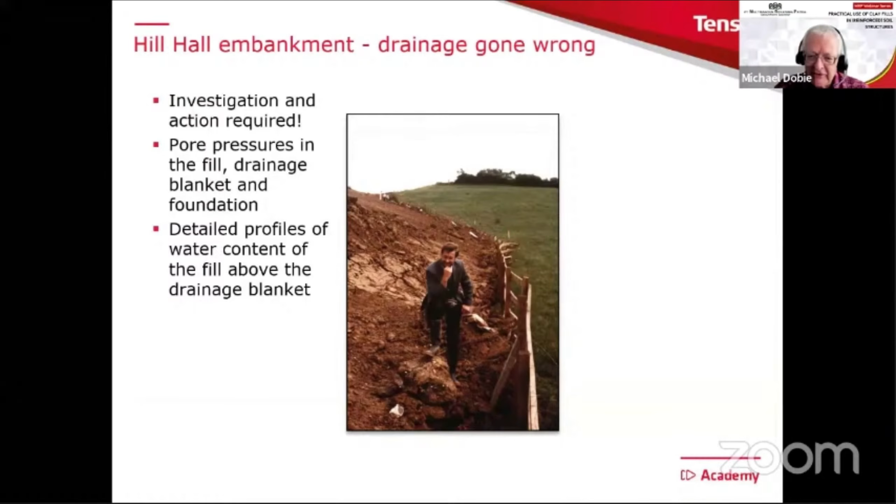So one thing that was done: some very detailed profiles of water content were made, literally taking samples at very, very small spacings, just millimeters above the drainage blanket, to look at the distribution of the water content. A careful look was also made at the grading and permeability of the drainage blanket.

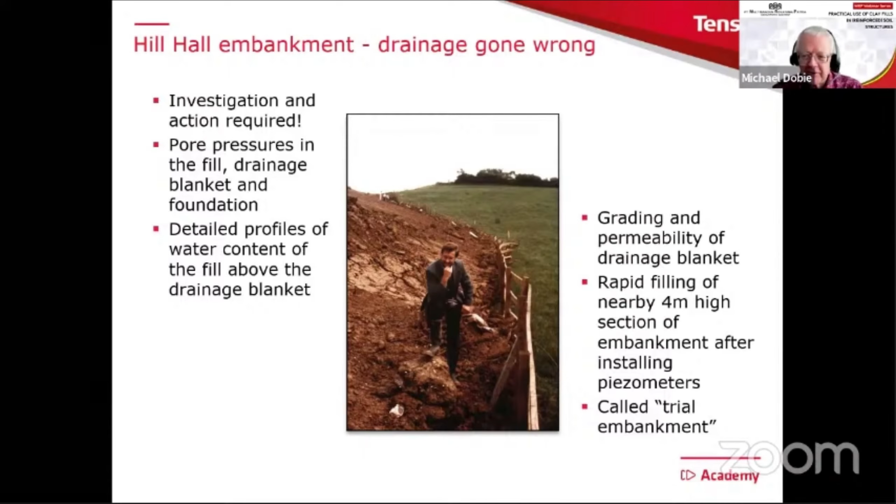But then what was very interesting was that nearby, there was an existing section of embankment which had only reached 4 meters high. So it was decided to install some piezometers into this and then place another 4 meters of fill very quickly. This was referred to as the trial embankment. So it looked like this.

So there was this existing section of embankment, 4 meters high, and they placed these piezometers. There are 3 of them shown there: P8 in the bottom of the fill, P7 in the drainage blanket, and P6 in the top of the foundation soil, which is also London clay. They very quickly built 4 meters of fill as quickly as they could to try and imitate what had happened.

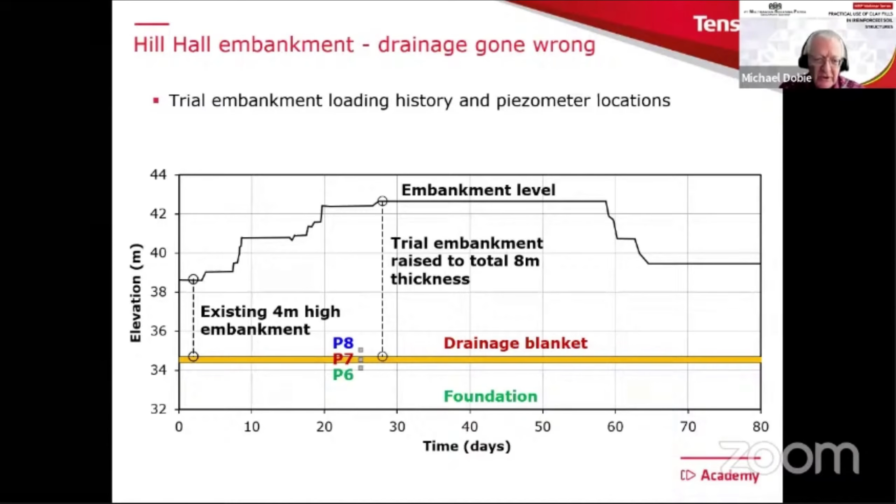And then we have here a record of the performance against time. The horizontal axis is time in days, going up to 80 days. The elevation, in this case, shows the location of the drainage blanket and also the top of the embankment fill. You can see the original 4 meter height, and then in a really fairly quick time, they build up another 4 meters to reach a total height of 8. So what I'm going to do now is superimpose on this diagram the pore pressure responses in P8, P7, and P6.

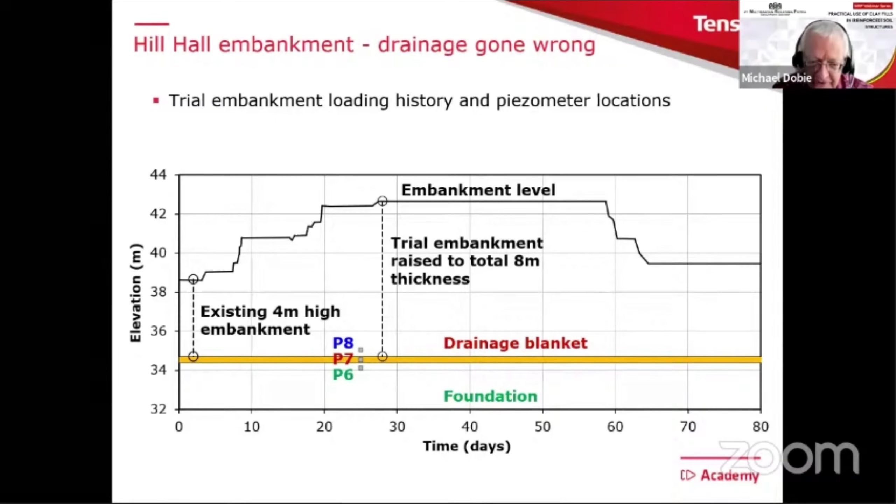And they look like this. It's worth just studying this diagram, because as you start to look at it, it doesn't seem to be right. P7, the colors match - P7 is the brown color, that's the piezometer in the drainage blanket, and it has the highest pore pressure. The pore pressure reaches that height - it's an elevation.

Whereas at the top of the foundation soil, the green line has a slightly lower pressure. But the weird thing is that towards the bottom of the fill, we have a negative pore pressure, because of course this was London clay, built to a very good specification of achieving an undrained shear strength, and it had a high suction in it. That's what we're seeing in the piezometers. So it's a bit difficult.

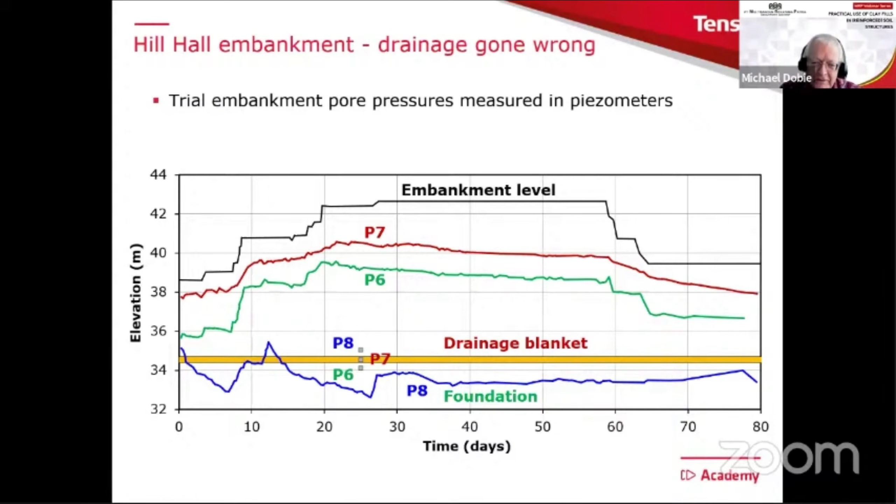So the obvious question is, well, why wasn't the drainage blanket at 0? Why wasn't it empty? Well, it was very, very wide and of a rather low permeability, and it really wasn't working very well. You can see it does slowly dissipate - the brown line does start to go down, but it does it slowly.

So what was going on was that the high suction in the base of the fill was absorbing water into the base of the clay, contributing to the problem which took place. So what happened - and this is mainly, or partly, my own kind of picture of what probably happened - is that we have a foundation soil, the field lying there, and probably the top of the foundation soil would have had low suction values before construction started. Then this rather low permeability drainage blanket was placed, sat there for quite a long time in heavy rain, and it got saturated. So the pore pressure was currently 0 before any fill was placed.

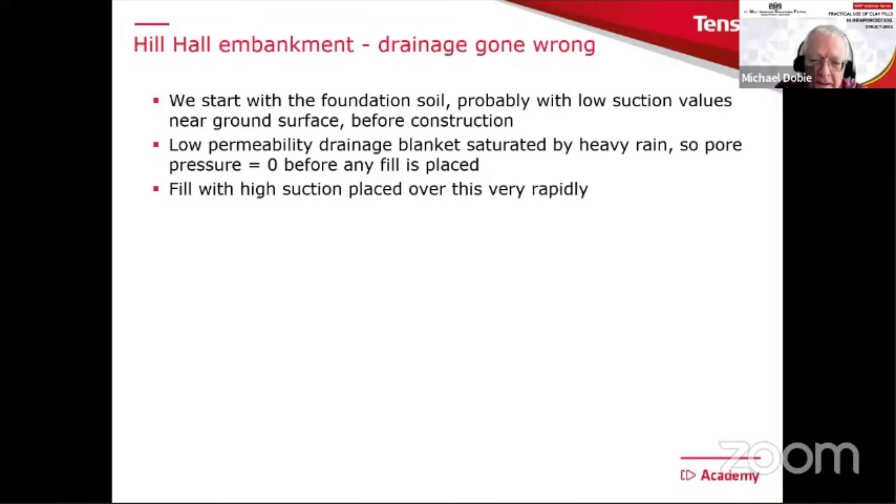Then the fill is built very quickly and with very high suctions over the top. So what happens is that the drainage blanket, with its high pore pressure, provides water to the base of the clay fill. And when it softens sufficiently, the strength reduces enough, even on that very gentle slope, to create a failure. The failure took place either just above or below the drainage blanket, either in the base of the fill or the top of the foundation.

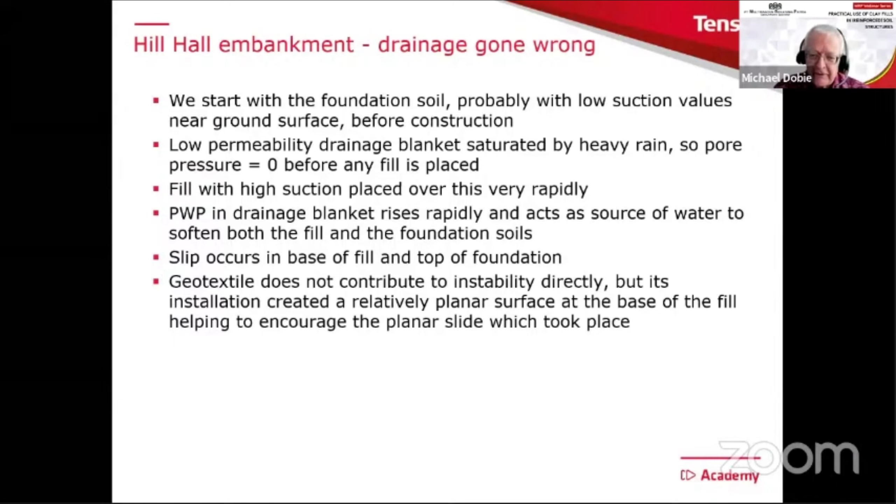There was a geotextile separator placed above the granular layer. It didn't by itself contribute to the failure, but the problem was it gave a rather planar surface, making it easier for that sliding to take place.

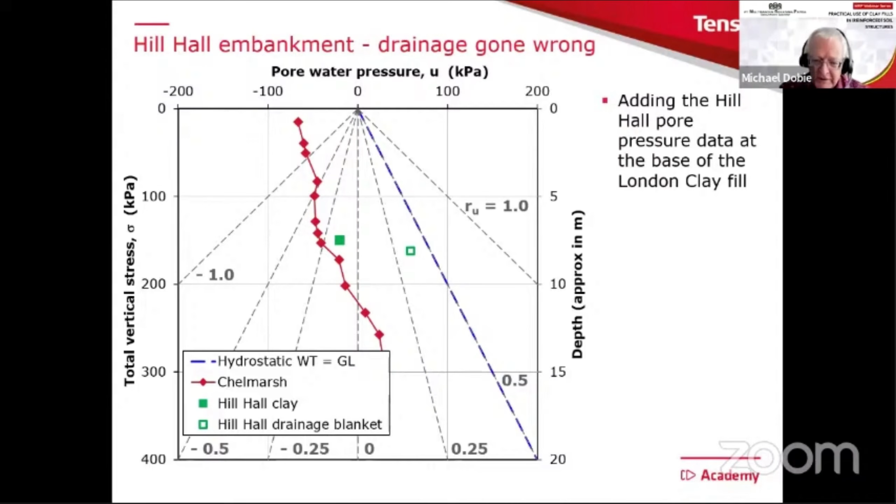If I go back to this diagram and plot that information, the solid green dot is the base of the clay. You can see how it matches the typical behavior we'd expect from a clay fill. You can also imagine that near the top it would be a much greater suction than we see down at 8 or 9 meters. The open green dot is the behavior in the drainage blanket.

So I've come to the end now. We've covered quite a lot of information, but just to remind ourselves about a few things: in a well-compacted clay fill built to typical highway specifications,

the clay is going to be in a state of suction to considerable heights. Very high fills may generate positive pore pressure at the base of the fill. However, in typical highway embankments, generally not reaching those heights so often. And of course, these suctions provide additional safety factor, which we don't normally take into account in our calculations. So it's a kind of bonus, but because it's there, we don't want to lose it.

I've already mentioned that only for very high or high fills are you likely to generate positive pore pressures towards the bottom of the fill. We saw that earlier on. If you are going to generate that, in most cases it's best to use a basal gravel drain, especially if you're in a situation where you might have high pore pressure towards the base of the fill.

It's important that drainage measures should be arranged to avoid prolonged contact of the fill with free water. Just remember that clay and its requirement to avoid being in contact with free water. Drainage blankets should be arranged with crossfalls and be in locations where they can essentially remain empty, so water can easily run out of them. They don't sit there providing a source of water to the clay nearby, like we saw just now with the Hill Hall failure.

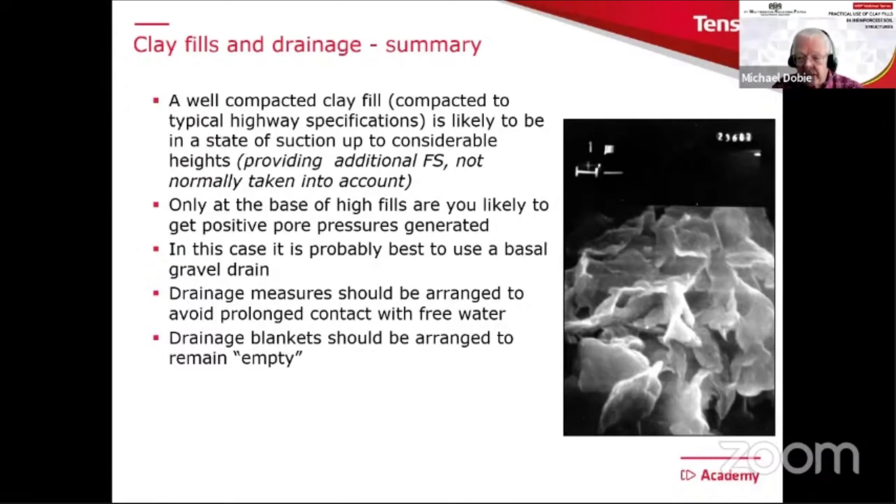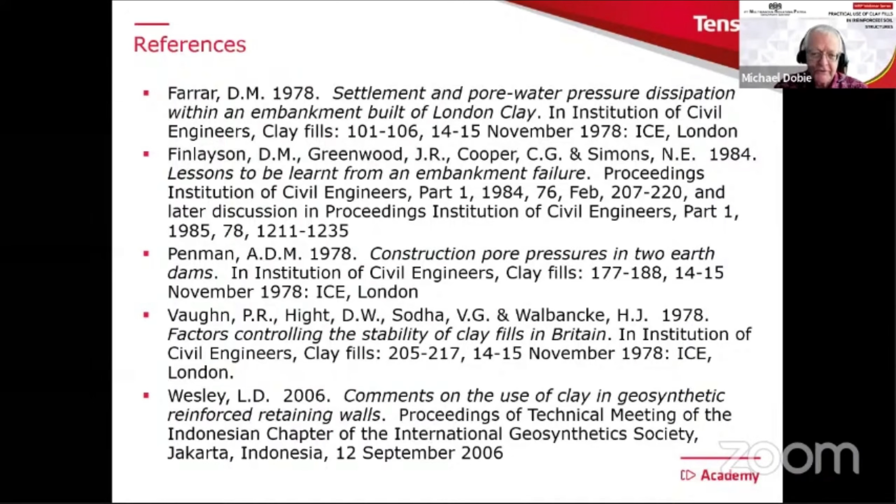These are the main references I used. There were probably a few others, like the books mentioned earlier on, where you can see the covers of the books. That's where my information comes from.